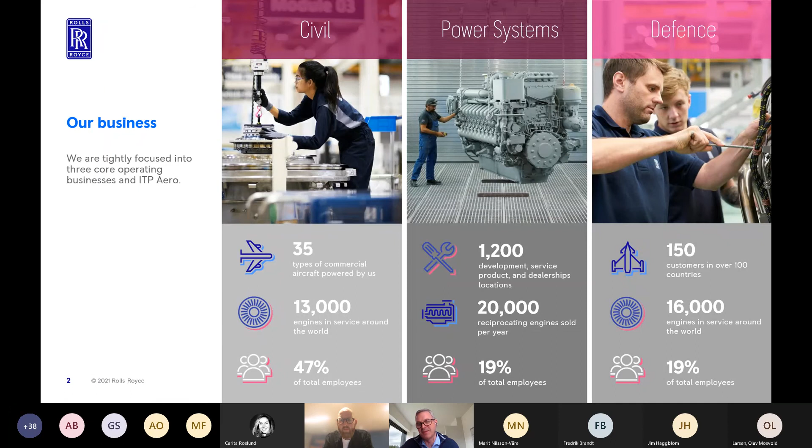A little bit on our commitment. Our commitment is net zero emissions by 2050 within our sectors. The reason I showed you the different businesses we have is also our background going into it. We have experience from jet engines, and we have experience with our diesel business in power generation. With that basis, we think we have an excellent position to work toward our 2050 goal around net zero emissions. So I'll talk you through a little bit of the different aspects of that today.

So let's see how we do now in these stages. For us, electrification is not a new thing in Rolls-Royce. I've been working with these kinds of systems for about 20 years. Here's some pictures showing what kind of products we've historically been working with.

Up to the left, you can see a train solution, typically through our diesel factories in MTU. We manufacture some sets, hybrid sets, where we combine electric and diesel. Also for the marine sector, we historically worked within offshore marine. Now, after the sale of the offshore marine business to Kongsberg, we work more into the yacht market, the tug market, and other markets, but also here there's a long history of full electric or partly electric systems.

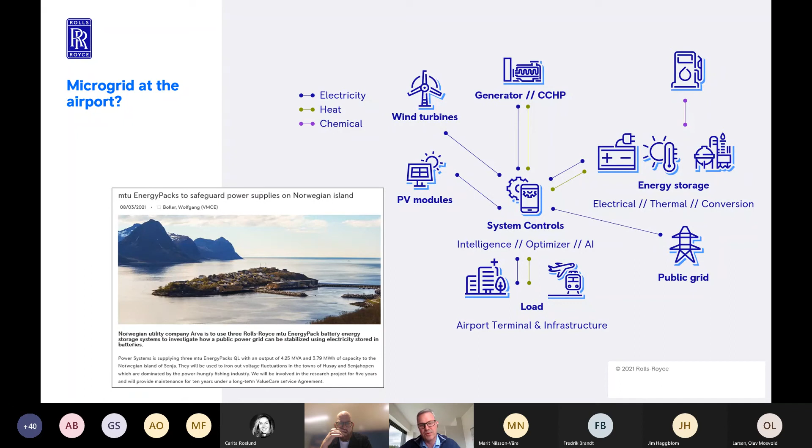So what we're looking into now is, okay, we also work with the charging system and the systems on board the aircraft. So we're now looking at how we should use this in an airport supply. For us, the deliveries up north in Norway are quite interesting, because it's about a fish farm. They have a fish farm with weak grids, and they're using batteries, some megawatt hours, to support the grid up there, so they can be more stable and have a trustable power source. Of course there are similarities with remote places up north in Norway, and we're thinking we might want to use this competence and these products also around airports.

So then to the key areas when we're talking about sustainable aviation. In Rolls-Royce, we are looking at the total picture. This is the nice thing when you have the gas turbine competence and products, and at the same time are doing, for instance, this new electrification work, you can have that overview and an opinion on how we can move ahead. For us, the first key topic is the gas turbine.

So for us, we see actually two-digit kind of numbers here. How can we improve the efficiency of a gas turbine? Some people might say, why do you want to spend money on this? You should use all your money on electrification or hybrid systems. But for us, it's actually quite key that we continue to work on this technology and continue to do those improvements. We'll see spillover effects later in this presentation. If you could do 10% better on your gas turbine, that has significant impacts on other areas, for instance when we look at the hybrid system.

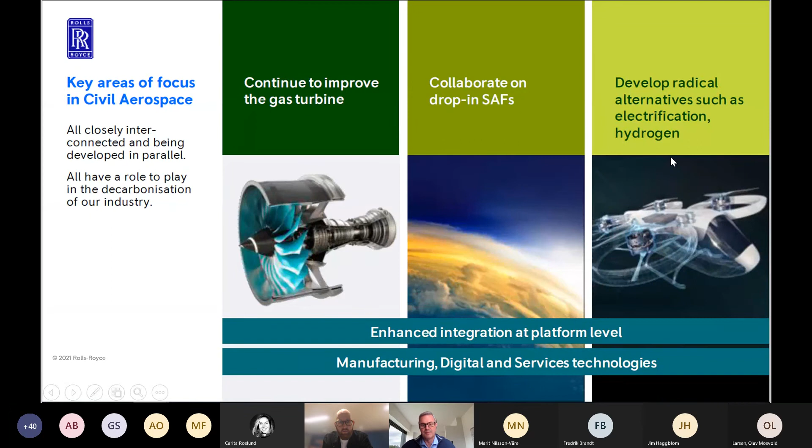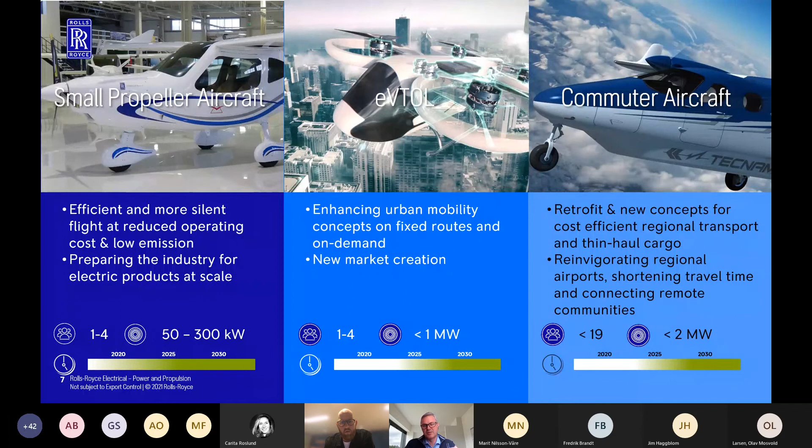The last market I want to mention here is the commuter market. We've been working around solutions up to 19 seaters, with powers up to around 2 megawatts. There's also been quite a lot of activity with different kinds of systems, whether it's a battery, a fuel cell, or other kinds of energy sources. There's been quite a lot of demonstrators and test programs, but now we are starting to see the next phase, the commercial contracts coming up. I'll show you a couple of those in the next slides.

Last month was the first news here around this eVTOL.

So this is a company called Vertical Aerospace. Here we have entered our first commercial contract with Rolls-Royce, where we plan to develop the system for this customer. The idea is to have a 4 passenger vehicle with 120 miles range and a cruise speed of 200 miles per hour, with an aggressive target to have this ready in 2024. This is a massive challenge, not just to have the technology ready, but to have it qualified as a product. So this is really what's happening now.

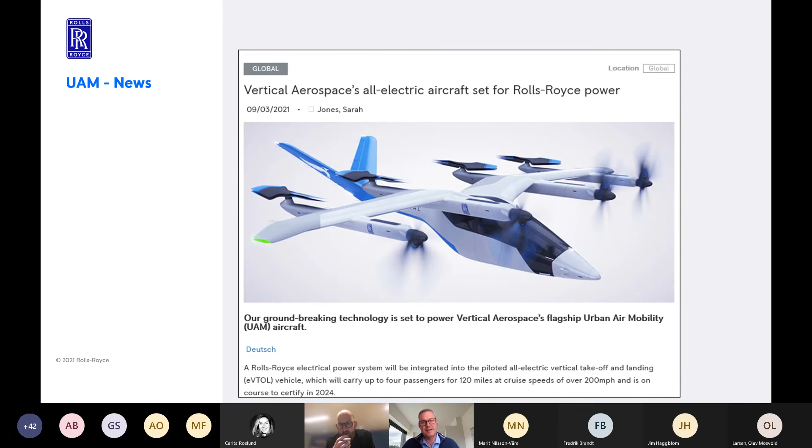Two days later, after this news, we had another announcement around commuter aircraft. We've been working a while in Norway together with Avinor to see what we can do and what stages we can take to approach the new normal for aviation in Norway. This press release was about positioning Avinor as the launch customer for this Tecnam aircraft we've been working with. This one is a full electric aircraft. We're still working on the specification - what's going to be the length of the flight - but this work has to be done in detail together with Avinor to see where it makes sense to experiment and test.

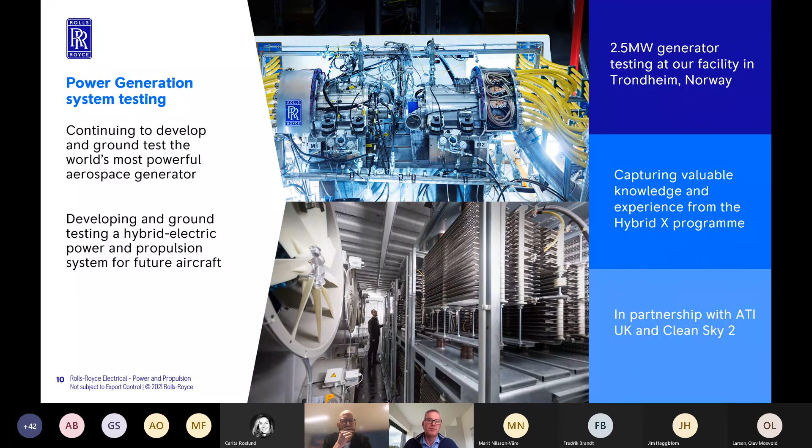The basic idea here is to start that journey into the regional market. We talk about the commuter market, but we also need to address the needs in the regional market. It's more of an open question how the solutions will look, but we do have an idea that we need megawatt-class capability for that market to go ahead. I should also mention there's still a partnership with ATI UK and Clean Sky 2 for this activity - even though it's not the EFANX program, we will continue with the same funding this year.

Then I want to mention some options, because there's often confusion around the press release with Airbus talking about hydrogen. What does it mean? A lot of people think maybe it's a fuel cell, but of course there are always at least 3 options here, and this goes for most fuels. The top option is an opportunity to use a fuel cell and make electricity, having an all-electric solution on the wing. A lot of smaller aircraft are talking about this - maybe they could change the battery, put in this kind of system instead, and have a better range. So there's a lot of activity going on there. Then there are 2 other options.

So if you combine something on the wing, you burn maybe most of the content, and then you have some kind of electric combination. In marine, this is perfectly normal - this is what we call a PTI PTO in marine. We've used this for 20 years already, but it might have some benefits, so this is one of the things people are looking into. And then the last one, of course, you could just burn it directly in a turbine.

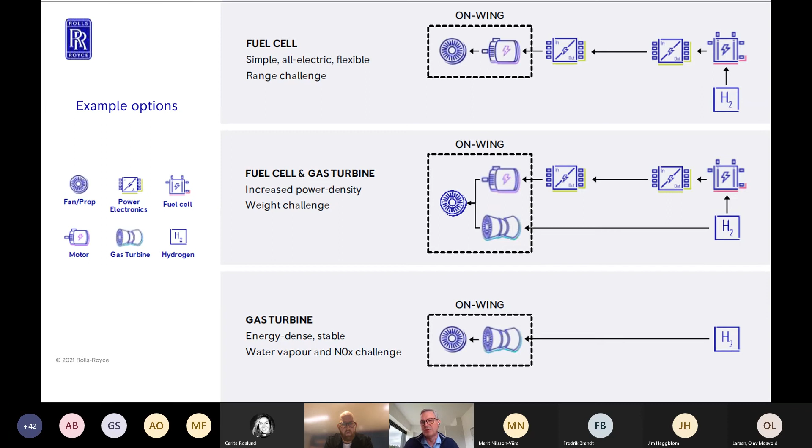So with these 3 options, they typically fit different kinds of ranges. Smaller aircraft - this has been investigated. Intermediate ranges have also been investigated, and for longer ranges maybe this is the more proven one. So 3 different solutions that fit different needs. This is what a lot of companies are now looking into and exploring.

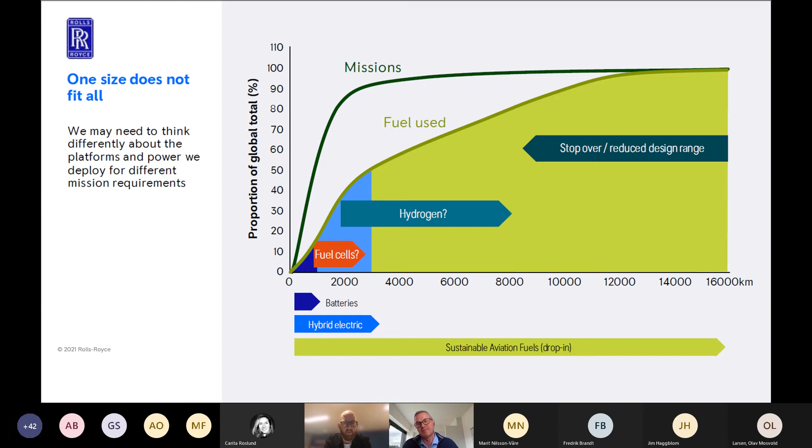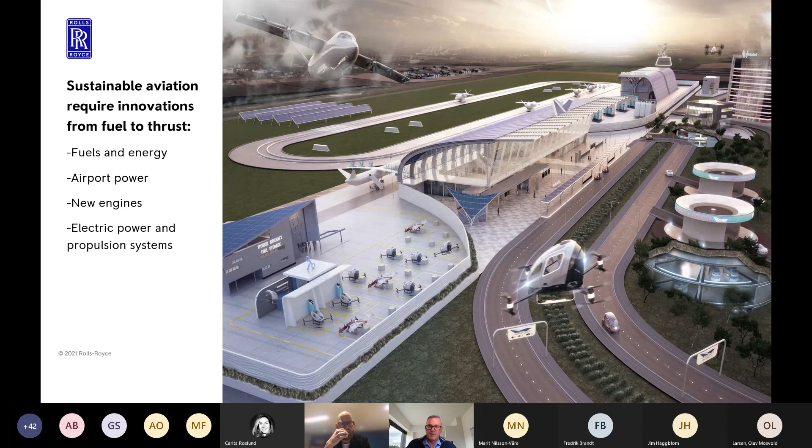So actually, this was it from my side.

Okay, thank you so much for the kind introduction. I can't see you anymore, but I hope and trust you can see me and the presentation. Yes. And again, I think it's really interesting, as always, to listen to Sigurd and Rolls-Royce. We actually had a little chat this morning trying to coordinate our presentations, and I think we agreed that in a perfect setting, I would go first to give the broad picture or background, and then Sigurd would go more specific from a very serious and big aviation OEM. But now it's the other way around, and perhaps that is fine as well, because now after hearing him talk, you might not think that I'm so far off from what is possible and what is not possible.

So I've been challenged to tell you a little bit about the new target or goal that the Norwegian aviation industry has set, which is to be fossil-free by 2050. I know that in Sweden you have a target of being fossil-free by 2045, so that's a little bit off, but I think it's still in the same ballpark, and we have obviously many of the same airlines and the same technologies available. So at least this is the Norwegian aviation industry's take on the task. For those of you who don't know our company, we are responsible for 44 airports throughout Norway, and we're also the national ANSP. I think we always try to say this, that Norway is totally dependent on aviation, and perhaps also parts of the world is too.

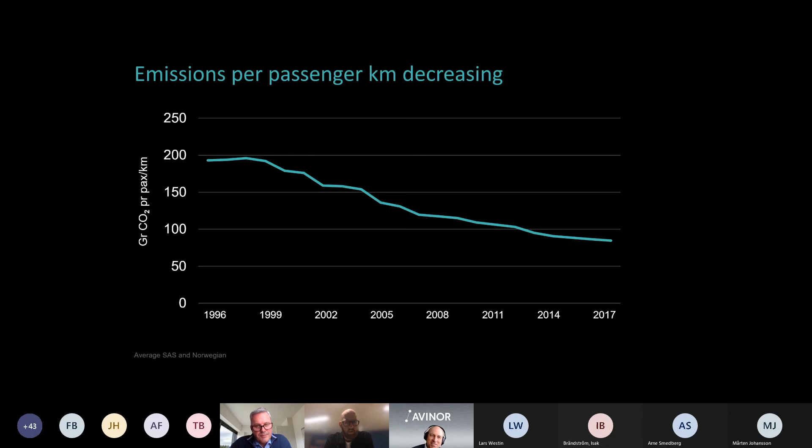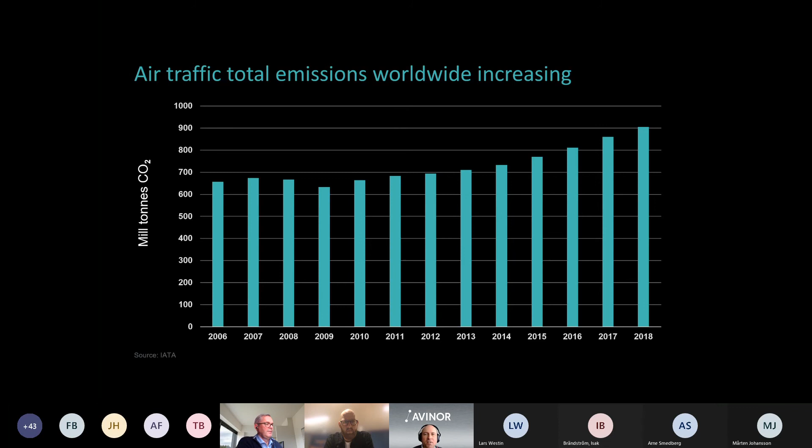But total emissions from the industry are growing, because until the virus hit us, traffic growth outpaced the energy efficiency measures being implemented. So we'll have to do something beyond business as usual to actually turn this curve downward. As Sigurd says, and we all say, in the aviation industry there is no silver bullet—we'll have to work on different solutions, at least in terms of technology.

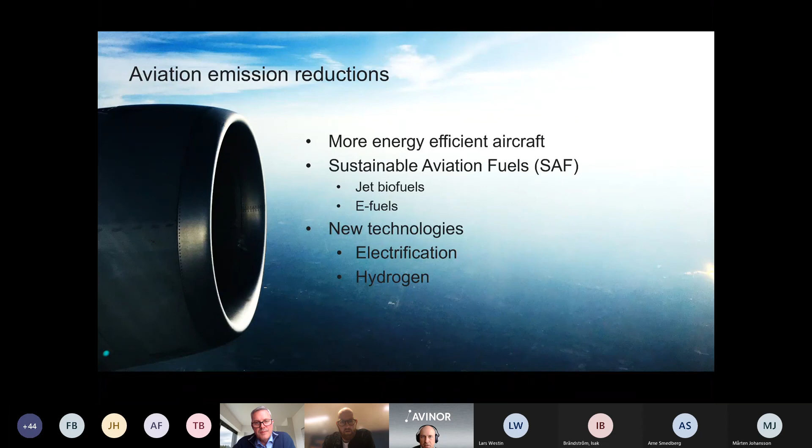I'll touch upon all of these a bit—not so much energy efficient aircraft and sustainable aviation fuels, I'll put more emphasis on new technologies, electrification and hydrogen, since I think that's of most interest for this webinar. But we could talk a lot about all of these solutions.

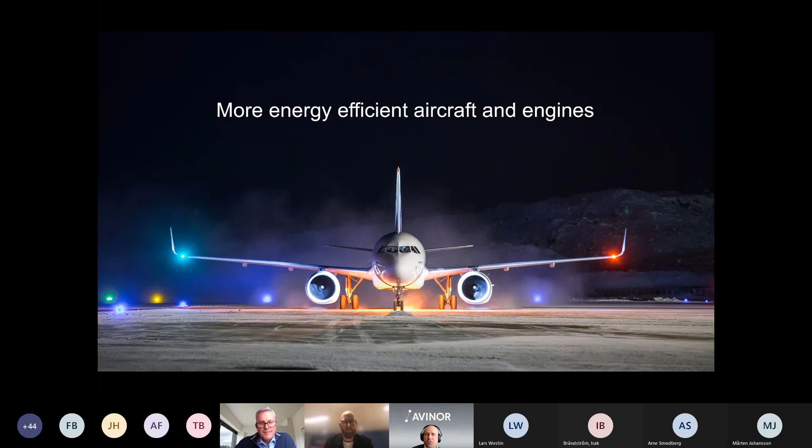As I mentioned, aircraft and engines are getting more and more energy efficient—a lot of improvements and huge investments from the airlines. I heard the discussions on capex and opex and all this; these are huge investments from the airlines into best available technology in terms of aircraft, as well as upgrades and maintenance.

When discussing what range is needed where and when, I'll chime in with what Sigurd just said: we'll need multiple technologies on the short-haul, very short-haul network and flights. Battery electric can be, and also for general aviation, a very viable option and solution somewhere between 2025 and 2030. And I think we should keep in mind, when discussing these new energy carriers, that although batteries are heavy, they're also a very energy efficient way of storing energy.

Producing hydrogen is energy intensive, and also storing hydrogen is heavy. So we will see what comes out as the preferred solution.

From Avinor's point of view, we're an airport operator. We are technology agnostic, to put it like that. We just would like to see zero and very low emission solutions in the Norwegian airspace and in the Norwegian aviation system. On more regional routes, hybrid electric fuel cell solutions will probably come into market around 2030, perhaps earlier.

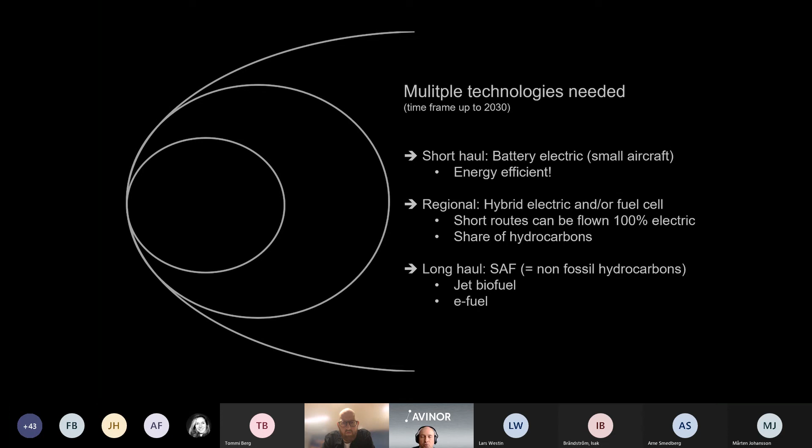It's different markets, different routes will perhaps find different solutions. But I think the whole aviation industry agrees that given the technologies we have at hand today, we will be dependent on sustainable aviation fuels for a long time to come. Both because of the range that the new modern aircraft have, you can fly 16,000, 18,000 kilometers from Europe to Australia without stopovers, and also keeping in mind how many aircraft are already in the market that will be in the market for the coming decades. So also focusing on producing and developing sustainable aviation fuels is extremely important in this picture.

Sustainable aviation fuels has been sort of a solution for quite some years now. I started working with Avinor in 2007, and I remember vaguely in those days there was a big discussion, at least in Norway, about biodiesel for cars. That was first generation biodiesel. They had issues with it in the north, where it was cold during winter and it was freezing, and all those issues. So many people came up to me and said biofuels will never be possible for aviation because it's so cold out there.

And then just a couple of years later, it was actually certified for use in civil air traffic. The good thing about them is that they can be dropped into the current aircraft and infrastructure, not really any investments needed. But the not so good thing about them is that price and cost is significantly higher than fossil fuels, and currently production is low.

So we will have to see some development here, and there will be development, and we are really excited to be part of that journey. We've been doing this for a little while in Norway now.

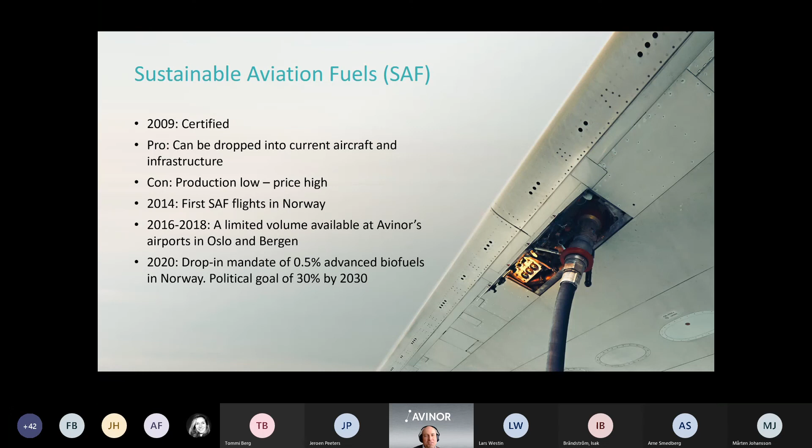So talking about these new technologies, electrification has been high on the agenda for a while in the Nordics, and I think that's extremely interesting. This is very similar to a slide that Sigurd showed, and I think he perhaps has left us now for his other meeting.

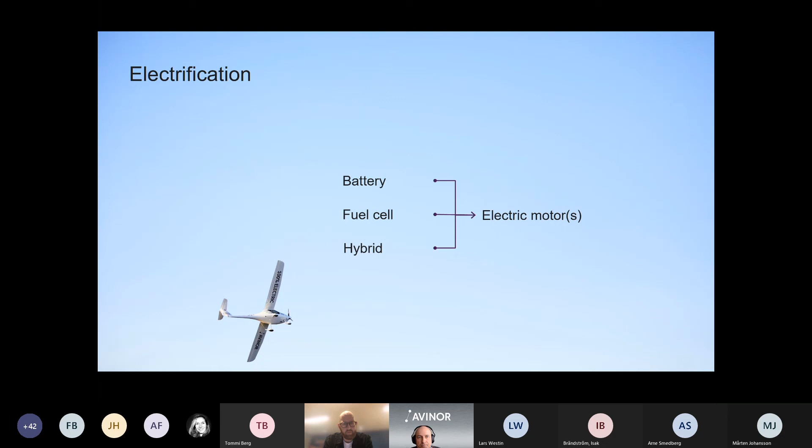So along the same lines, in Norway we have made, at least from Avinor and the civil aviation authorities, a definition of electrified aircraft, and that is aircraft with one or more electric motors for propulsion in the air. They need electricity from somewhere, whether it's battery or fuel cell or some kind of hybrid solution, but it's still like an electrified aircraft.

Rolls-Royce is one of the kids on the block here, but there are more than 200, as far as I know, projects ongoing worldwide related to electrification of aviation. I will not delve into all of them. I'll give a few examples, but first let me tell a little bit about our story, how we started working on this from Avinor and the Norwegian aviation point of view.

So the first time I heard about an electric aircraft was this one, a Pipistrel that flew in 2010, and I thought, well, maybe wait and watch, monitor, see what this will develop into. And then, at least from all the market intelligence I was able to gather, not that much happened the next years. But in 2015, the same guys that flew the Pipistrel actually crossed the English Channel.

That was a key moment for us in Avinor, because that flight was something like 72 kilometers from an airport in the UK to an airport in France, and that is longer than many of the flights carried out on the Norwegian network today that are actually flown commercially.

So a few years later, we decided to buy this aircraft. I think we ordered it in 2018 and had delivery of it in 2019, and we flew it for 2 summers, and then we had a motor failure, so we had to make an emergency landing.

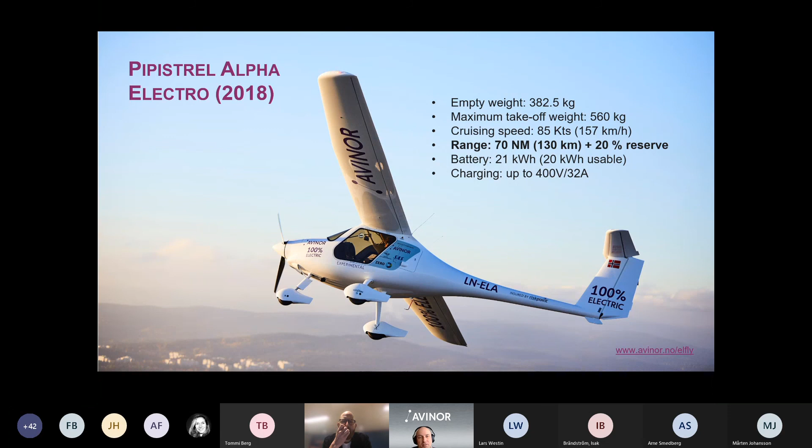Unfortunately we had to land in a small lake, a small pond. But we have now ordered a new similar aircraft, the successor of this one, the Pipistrel Velis. And what I think is key here is that this little aircraft has almost 130 kilometers range, or somewhere in that range, and that is definitely a range that can be operated on some of the shortest flights in Norway.

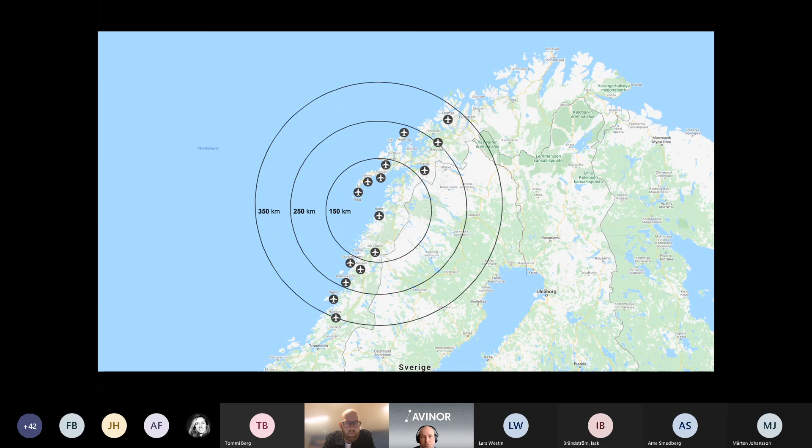You're aware of Heart Aerospace. Anders and the guys are talking about somewhere around 400 kilometers range. I really hope they succeed in achieving that, because this aircraft could be a fantastic vehicle for some of these markets or some of these routes.

But it's not only Bodø. I don't know if you see my arrow here, maybe I should make a circle with a pen. I just showed you this area, but it's also, like Sigurd said, some interesting stuff, interesting area here. There are also city pairs that can be connected. And then obviously the very short flights in the very cold region of Finnmark, challenging at least in terms of weather conditions here. Many quite interesting markets where fully electric or hybrid electric aircraft can really do a decent job.

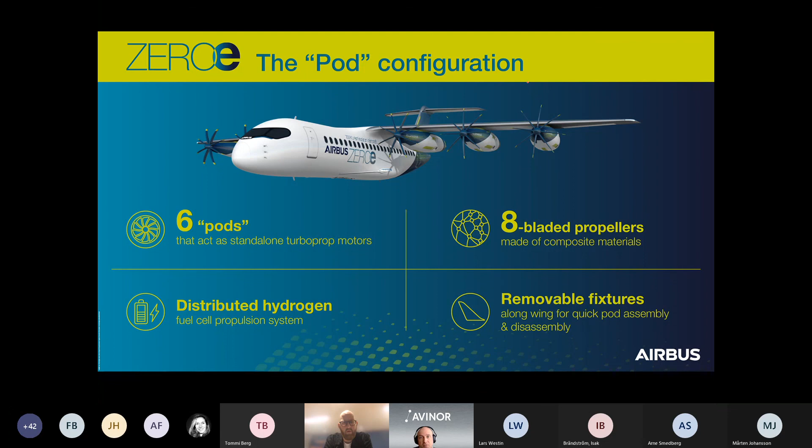And not least, they're also discussing variants of hydrogen hybrid solutions for longer flights that could perhaps replace the single aisle aircraft we see today, the 737s and the A320s, with up to 200 passengers and a range of up to 2,000 nautical miles.

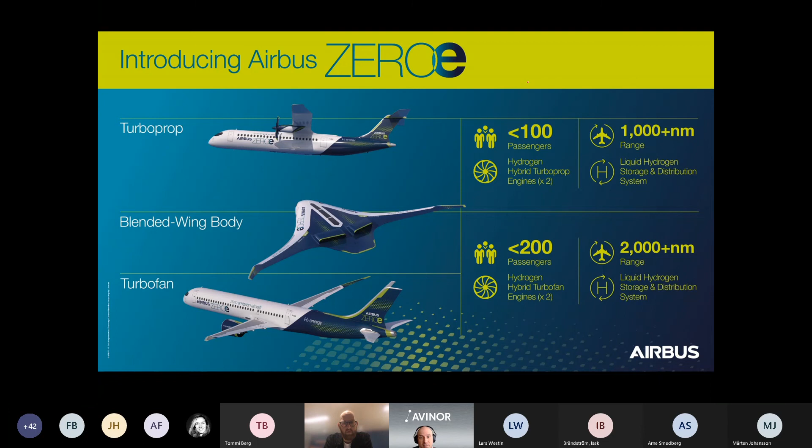At least this is the ambition of Airbus, and from a Scandinavian or Nordic point of view, that will take us quite far. 1,000 nautical miles will take some of us almost to London, but if we get 2,000 nautical miles, almost 4,000 kilometers, it will cover all European flights from the Nordic countries. That's a huge chunk of the markets in the Nordic countries. So extremely interesting and promising projects ongoing there.

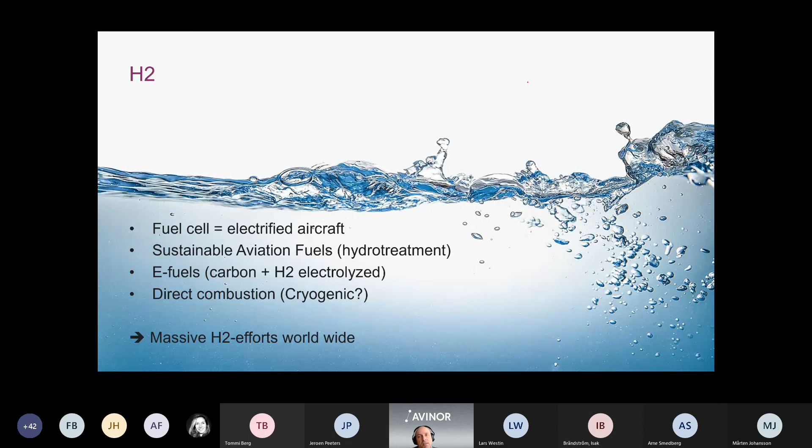And I must also say a few words about hydrogen. It is currently, with the technology of today, fairly energy intensive to produce, and it can be used in a whole different range of solutions for aviation. It's a very convenient energy carrier. I mentioned already fuel cells and direct combustion or hybrid solutions, but it's already used today in production of sustainable aviation fuels. And then electrofuels is coming up also as an interesting solution. We see so much going on in the hydrogen domain now, not only in the Nordics, but also worldwide. This is something we will monitor very closely in the future.

I think it's also important to emphasize, and that might be one of the key points from an airport operator and air navigation service provider perspective, that we have to work together on this. New energy carriers will impact the whole aviation system in terms of the operational capacity of the aircraft, the energy needed, and aircraft will have to be refueled or refilled or recharged somehow at the airports.

We are doing quite a lot of work on that internally in Avinor, and I know they're doing the same in Swedavia, and also other airport operators around the world are really looking into this now. So it's extremely promising, and I think it's fair to say that the airports have an ambition that we will not be the bottleneck here. At least speaking for Norwegian airports, and perhaps also for my colleagues around the world, we would really like to see this happen, and we will do whatever we can to help speed up the transition.

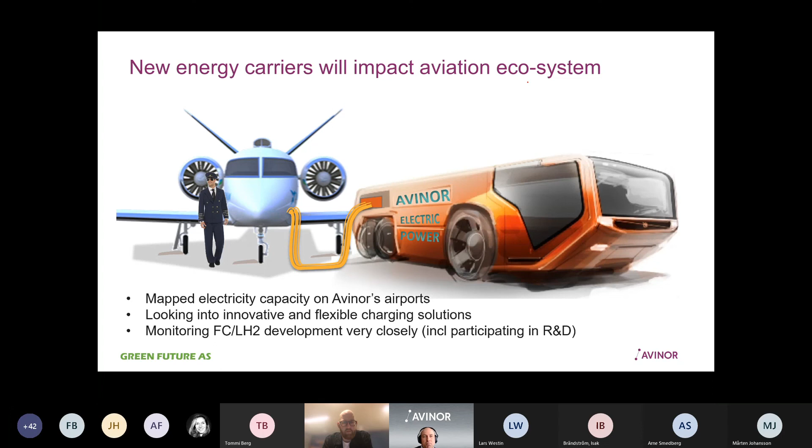A little bit back to the work we've been doing on the fossil-free aviation goal. This was initiated in 2007. We're working together with the main stakeholders in the Norwegian aviation industry, and we've also teamed up with the green groups, the environmental NGOs in Norway, for quite a few years. They've been part of these processes, not only on the reports we've been writing, but also on other projects related to sustainable aviation fuels and electrification. The first work we've been doing on this has been mainly facts and projections and rather descriptive. There has been a need to agree on what is left and what is right, or the basic facts here.

But now, in the last year, we actually also managed to agree on a common goal and a roadmap on how to get there. And when discussing this with people from outside the Nordics, some people think this is science fiction, but we believe that this is actually very much doable.

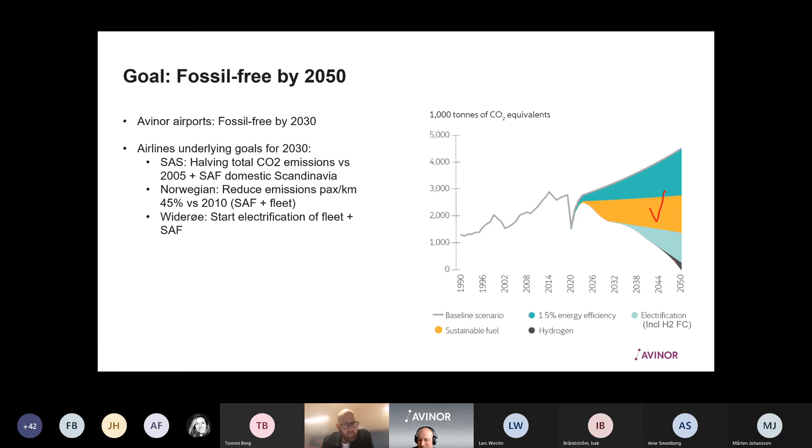We've been doing a lot of work on sustainable aviation fuels over the years, and if we just use what is available of waste and residues from the forestry industry, we could perhaps produce up to 350-400 million liters of sustainable aviation fuels in Norway, taking 30-40% of all the fuel uplifted today. Then in light green, which is electrification - including hydrogen fuel cells, and perhaps also a small share of hydrogen direct combustion as we get closer to 2050. So these are projections we've made. I'm sure they will be revised - that's actually one of the things we will do in the future, revise and update this chart.

So we'll see how this all turns out. But I think it must be said that these are costly but very necessary emission reductions. I also think it's important to state that the aviation industry is highly competitive, so it's important to create some kind of level playing field. It is not possible for the Norwegian, Nordic, or Swedish aviation industry alone to take this development forward. Cooperation is key, not only between airlines and airports, but also between the aviation industry and states. So public-private partnerships will also be key, we believe, in the future.

So we have now agreed on an ambitious goal and a roadmap. We will benchmark, revise, and develop this work, and we are lucky to have dedicated airlines and top management support. We're working on a program for sustainable aviation fuels. We're trying to establish a test center for zero and low emission aviation. I think maybe some of the key takeaways from this work is that we've had a very transparent and fact-based approach, including the green groups, the labor unions, and also the trade unions.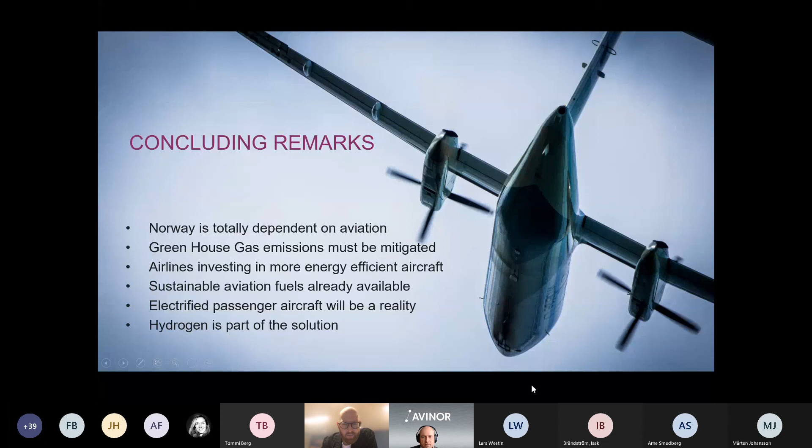Great, thank you very much, Olav. Another very good and clear presentation. I take your point that you had discussed with Sigurd to switch the order, which is good feedback, but I also think it worked quite well in this case to have you build upon the broad perspective laid by Sigurd and expand it as you did quite well, showing the many different aspects that become part of this challenge. Also, the high ambitions are really nice to see so boldly stated, and you showed the long history of collaboration and all the efforts made to create a platform for this ambition now to be launched stronger. I really appreciate that. Thank you very much for that presentation. I think we see already some questions popping up, so if you don't mind, we should go towards that.

Jeroen, you were first. Please go ahead and ask your question.

Thank you very much for the presentation. I live in Torsby, a small city not that far from Oslo, so I'm hoping we will have electric aviation going to and from Torsby to Oslo. But I actually had another question around sustainable aviation fuel. Looking at it today, the very small amounts available, I guess the biggest manufacturer, which is Neste, still hasn't been able to stop using products from the palm tree, and they really seem to struggle to show that they can actually call it sustainable. What are your thoughts on this, and also compared to electrofuels? Which one do you think will be the winner in the end? Will it be sustainable aviation fuel based on biomass, or will it be from electrofuels produced from electricity, making some kind of liquid fuel?